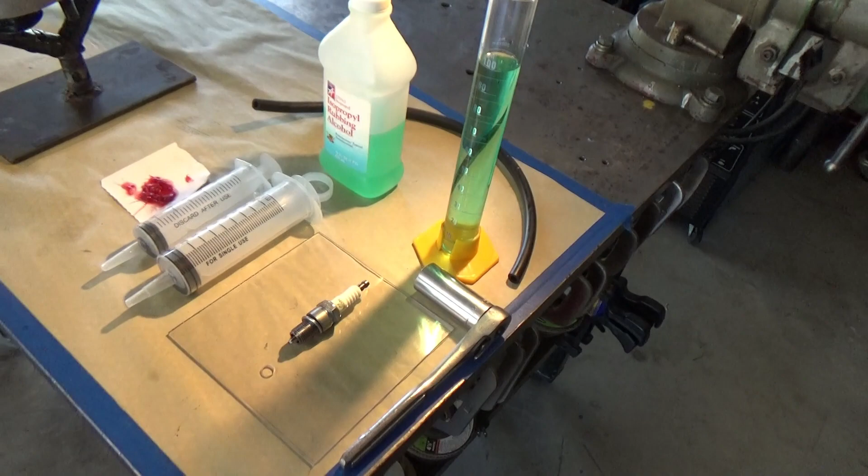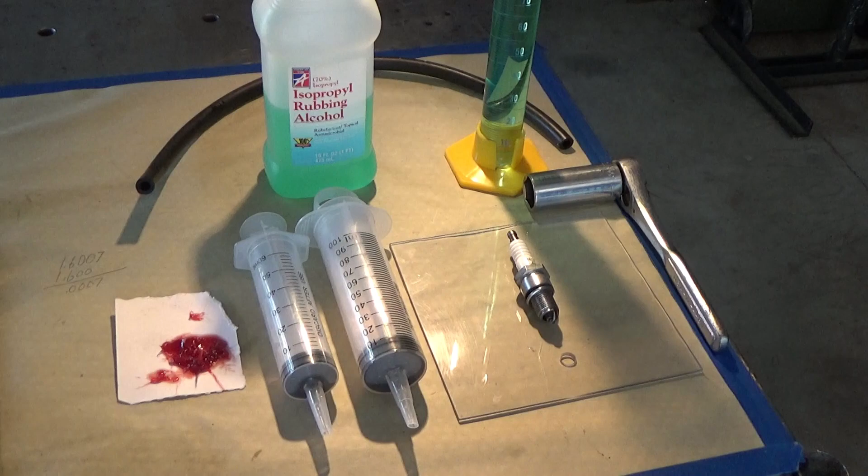On today's video, we're going to be verifying the compression ratio on this Big Block 454 build. Now, here are some of the tools I'm going to be using to get the compression ratio and also to find the cc volume of the chambers there. Now, I went with the syringes just because I thought it might be the cheapest way to go about doing it. You can buy those on Amazon or eBay.

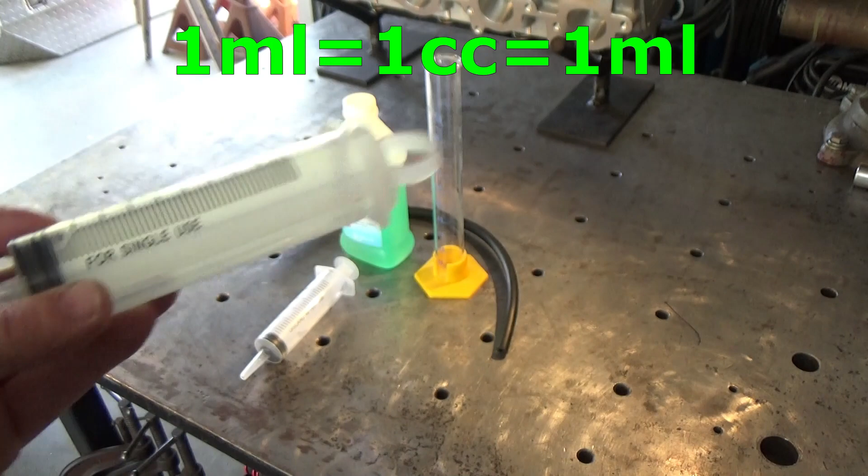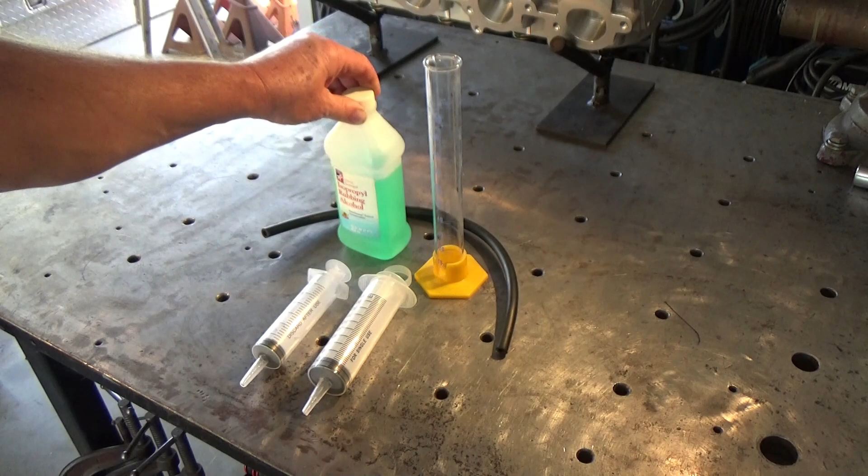Also, they have milliliter graduates, but milliliters and cc's are the same thing. And also rubbing alcohol. I like the surface tension of it. And then also a graduated cylinder. And I seem to like the graduated cylinder a little bit better as far as the measuring.

Alright, so the first thing we need to do is seal up the chamber so it doesn't leak. Now, some people will open the valves up and put a little bit of grease around the valve to be a seal there, but these heads here seem to seal up really good, so there's no leakage there.

So I'm just going to be sealing up the chamber on the outside with a piece of plexiglass. Now, the plexiglass, I just ran down to Home Depot and they sell little pieces there, and I drilled a hole in it, and then the grease seals it to the cylinder head. So we're going to use the syringes first.

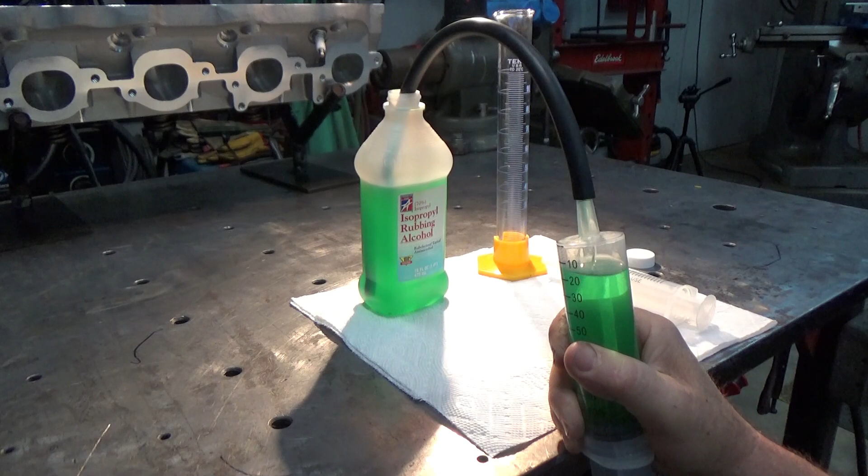I found the easiest way to fill that up was just to put a piece of hose on there, and I could draw some out, and then where I had the air bubbles and the air trapped in the top, I could push it all the way back out and then draw back down to the 100 milliliter mark.

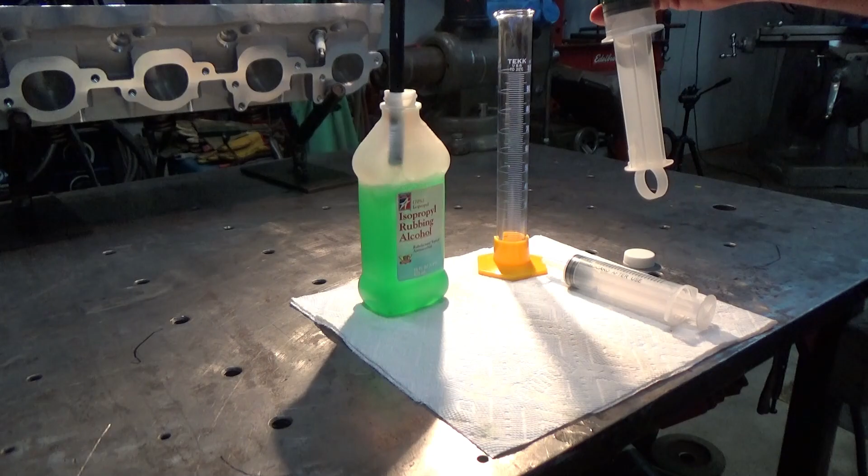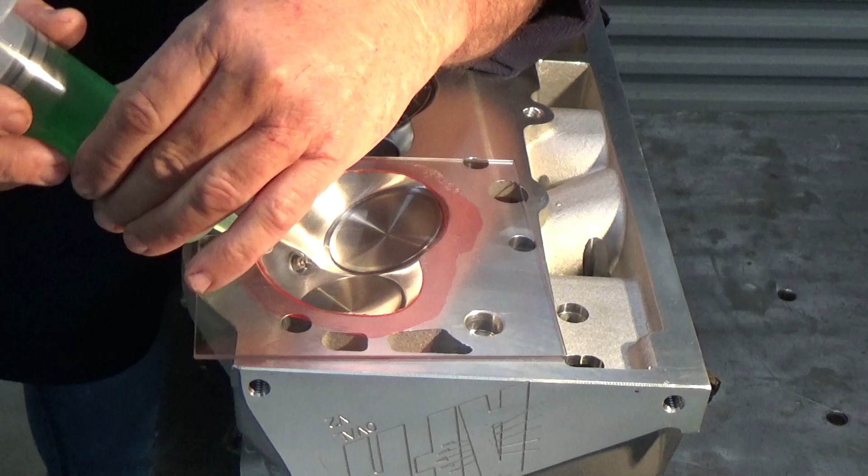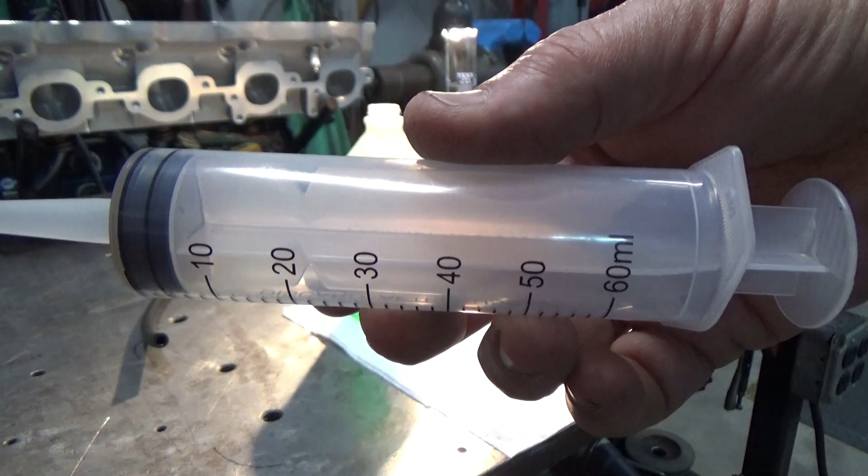Now, since the chambers are advertised at 112 cc's, I knew it would take the whole 100 milliliter syringe, so I just push it straight in there. Now, the second syringe I bought is 60 milliliter, and I thought the graduations might be a little bit more accurate, which is why I bought that, but I ended up not really liking the 60 milliliter one, so I filled it up the same way.

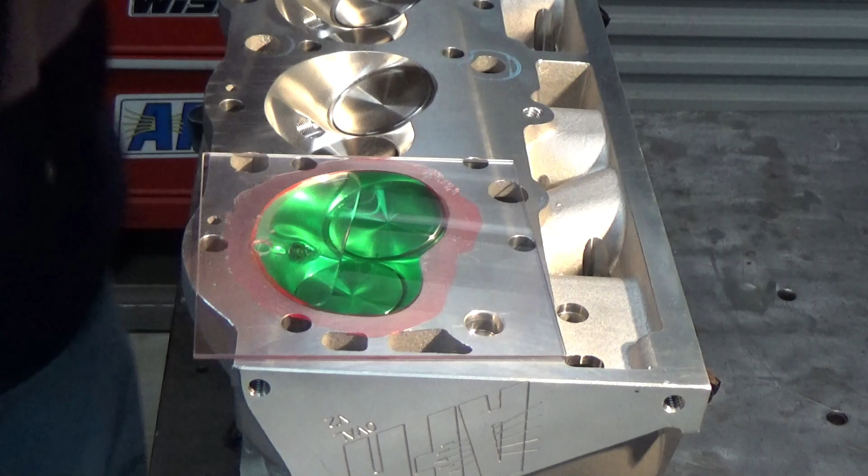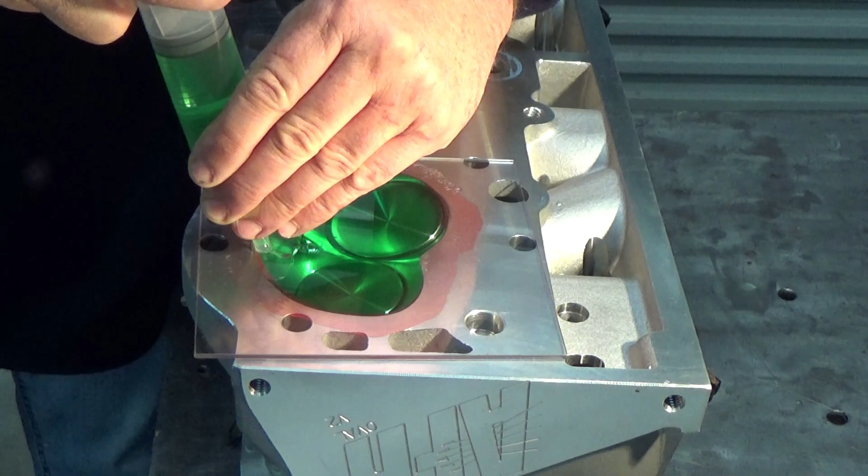Now, one thing I didn't like about the syringes is at the nose, at a tilt, sometimes some of the alcohol would leak out. And also, for whatever reason, when I was pushing on the 60 milliliter syringe, it wasn't smooth, so I didn't have the control that I hoped I would have. But it just could have been, maybe it didn't like the alcohol or whatever, I'm not sure.

Alright, sometimes you'll have some air bubbles. You can actually pick the head up and down, move it around, tap on it a little bit, try to get the bubble to come out, and then you can finish filling it up. Alright, so by the syringes, we have 100 milliliters in there, and that one there is looking like a heavy 13, so 113 cc's by the syringes.

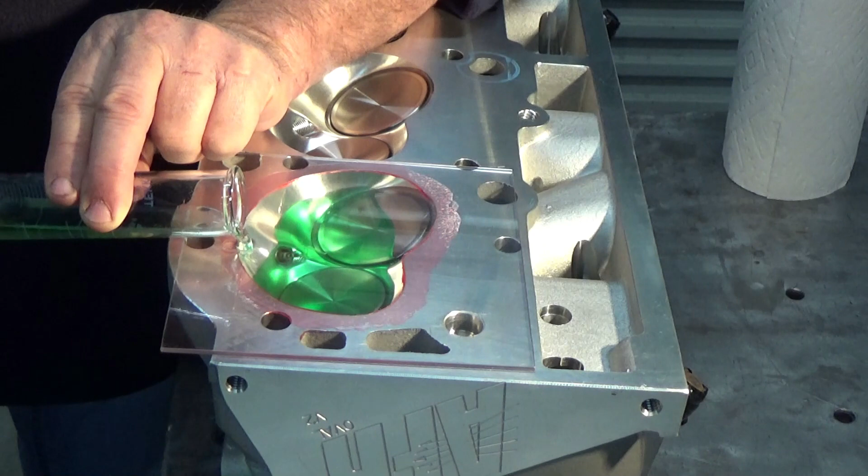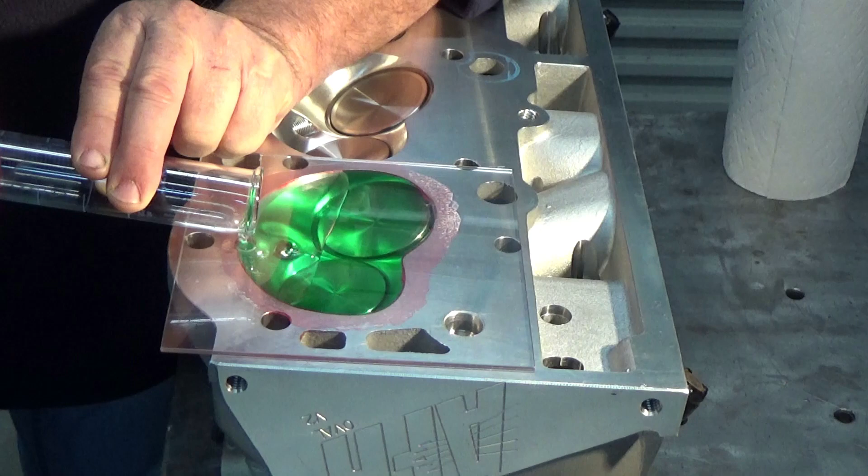Now we're going to use a graduated cylinder, and it's more of a lab type piece of equipment. I feel like it's a little bit more accurate. The hardest part with it is pouring it into the chamber itself, but it actually worked out well. I was able to pour it in there without any trouble at all. Alright, so we got our 100 milliliters in there. Let's fill it back up.

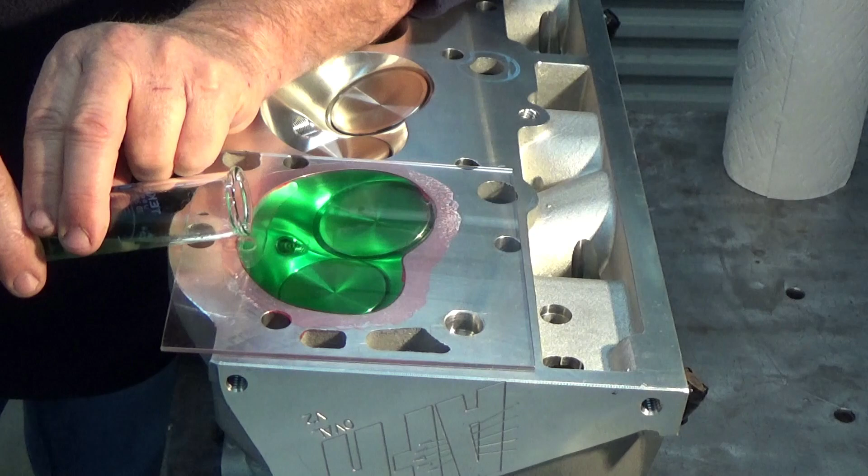Alright, let's see what we got. Now the graduations there are 1 cc, so we have exactly 112 cc's by the measurement of that system. So let's get the other cylinder head on there and verify that it measures at the 112 cc's as well.

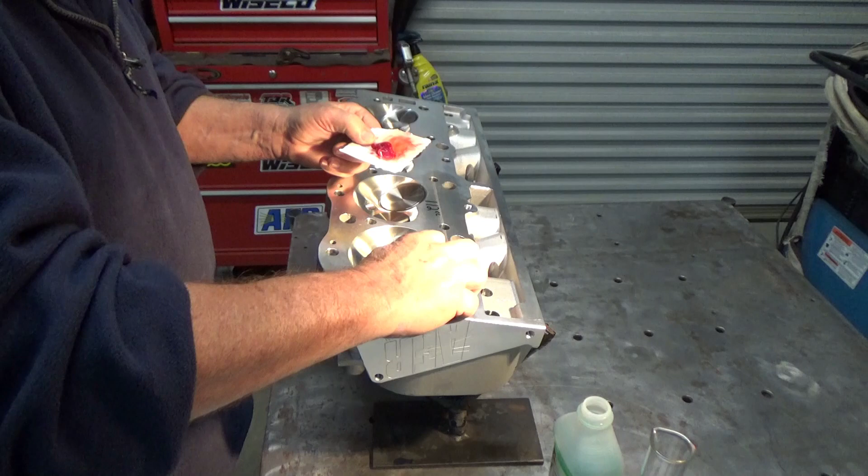Now the reason I'm doing this now is, when I was buying the parts for the engine, I had a target compression of anywhere from 10 to 1 to 10.5 to 1. So all I'm doing now is verifying I'm within reason of those compression ratios I was hoping for. Because at this point here, I could have the head milled.

Say the compression ratio is a little bit low, I could have the head milled. Say the compression ratio is a little bit high, I could have a thicker head gasket. So I still have a few options to get in that target area that I was shooting for on this engine.

And I think we're going to find out that these, you know, I bought these AFR heads and they had CNC chambers and everything. And I think we're going to find out that the accuracy is very good on this stuff. So we'll finish this one up.

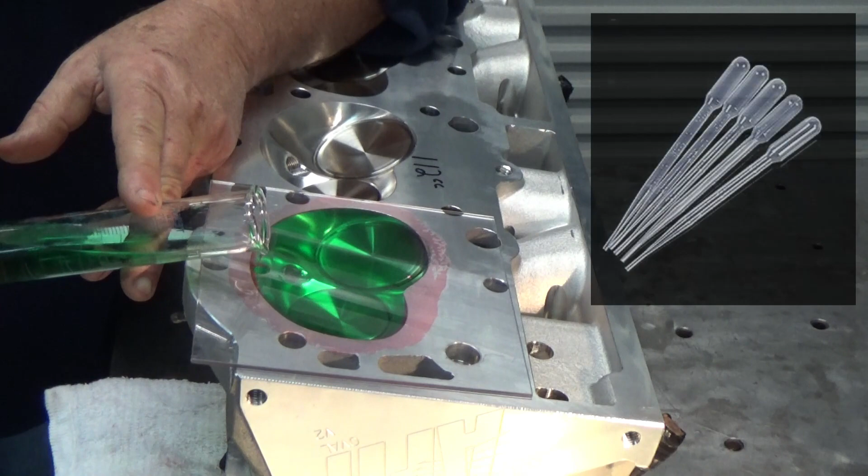And I also thought too, if I had bought some eyedroppers, that might have been even easier on the second part, because whatever's left in the eyedropper I could have dripped back. But there we have exactly 112 cc's again. So both heads measured to be the same.

Now the part I did like about the syringes was getting that alcohol back out of there. Years ago I used to just open the valve up and let it drain out the port, or use a rag to sop it up. But with these syringes I could suck a lot of that alcohol out and save it.

And even green alcohol, at least where I live, was kind of hard to find. So I actually had to make it with some green food coloring I had. And with the leftover alcohol, you can actually use that to help clean up the grease. Alright, so we CC'd those. They're advertised at 112. We found them to be 112.

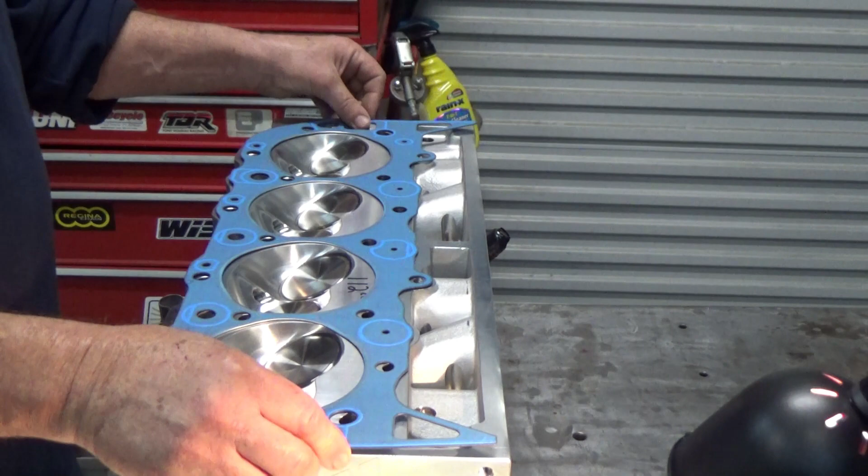So the next thing is the cylinder head gasket and how thick it is and the area it has. So when you look at that, you can see the thickness of the head gasket; we need to figure out how many cc's would fill that area. And luckily, Fel-Pro offers that information for us. So those head gaskets there have 9.17 cc volume.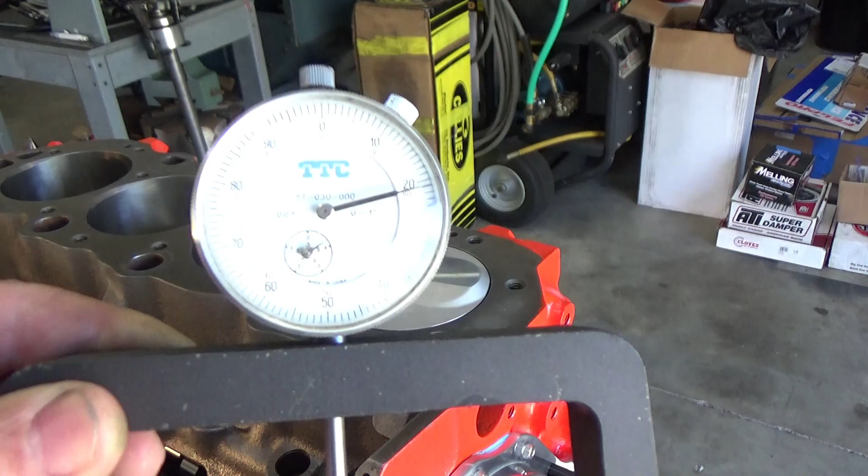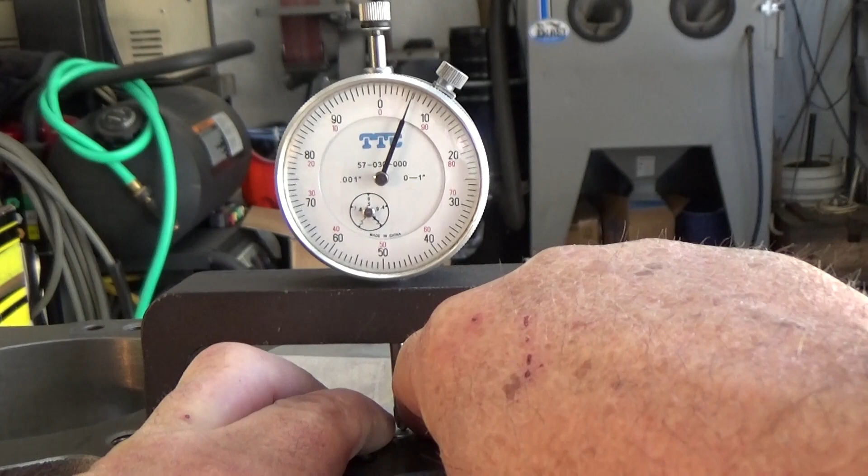So the next thing I want to figure out is the deck height. Now on this engine I went for about a 5 thousandths deck height. That means the deck is 5 thousandths taller than the piston. So with the dial indicator, all I'm doing is getting the piston square in the bore on both sides, and then I'll be able to verify what my deck height is.

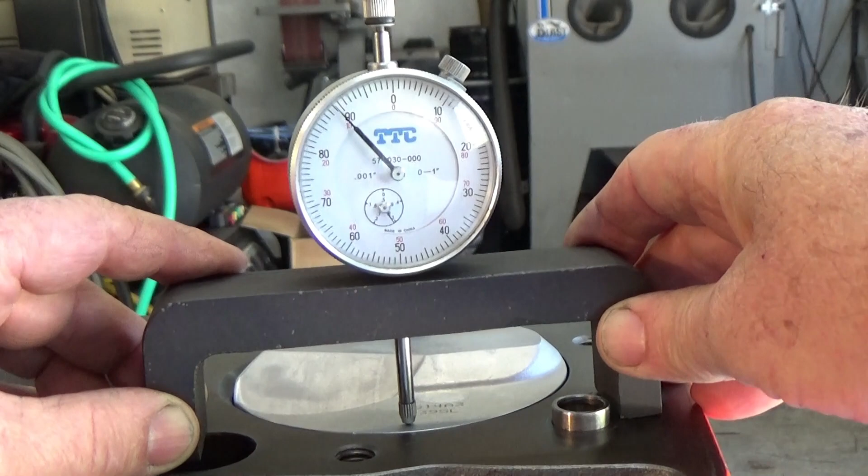Alright, so it looks like I have a 6 thousandths deck height, and so I have to do some math to figure out how many cc's that is.

Alright, also on this engine, I machined valve reliefs on the intake side because of the bore size. I put those valve reliefs in there maybe to help flow a little bit, but also I wonder, well, how many cc's are those? So I'm going to take some clay, an old piston, and see if I can't figure out how many cc's that relief is.

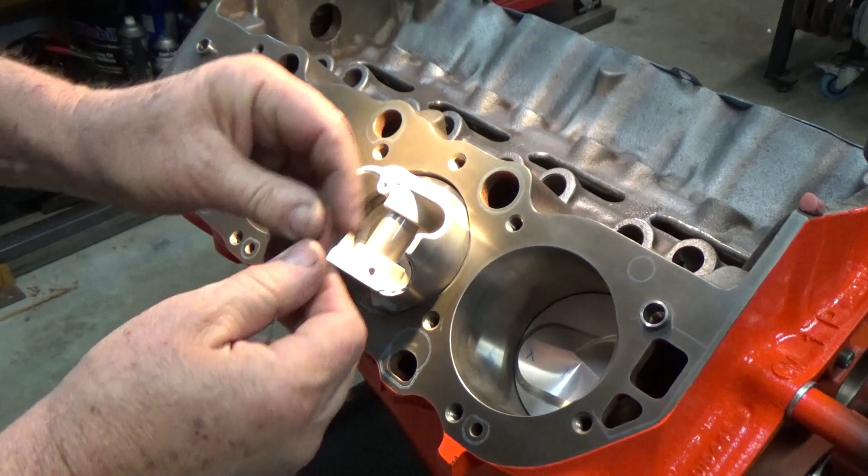So I just stick an old piston in the bore, I take a little bit of clay, and I push it into that relief. Once I have it pushed in there real good, I'll take a razor blade and cut it off at the deck. I pull it out. Alright, so there's a valve relief.

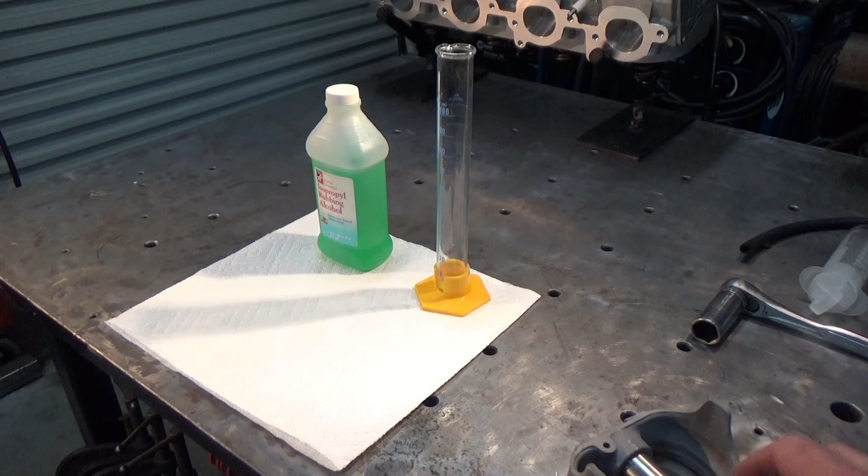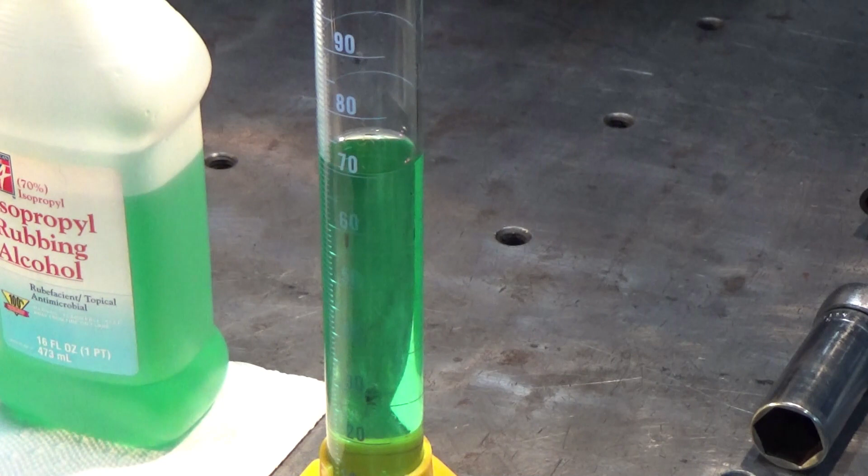And so now I'll take that graduated cylinder and I'm going to fill it with alcohol, say to 70 milliliters exactly. And then I'll peel off that little piece of clay and I'll drop it in there, and however much higher the alcohol rises will be how many cc's that relief is. Alright, let's drop it in there and see what we get. Alright, so it looks like about 1 cc.

Alright, so we got that too. Now the piston pop top, how many cc's that is, and Wiseco offers that information. They're saying it's a plus 21 cc pop top piston. So I can take all that information, I can do some calculations with it, and by the calculations I came up with, I have a 10.146 to 1 compression.

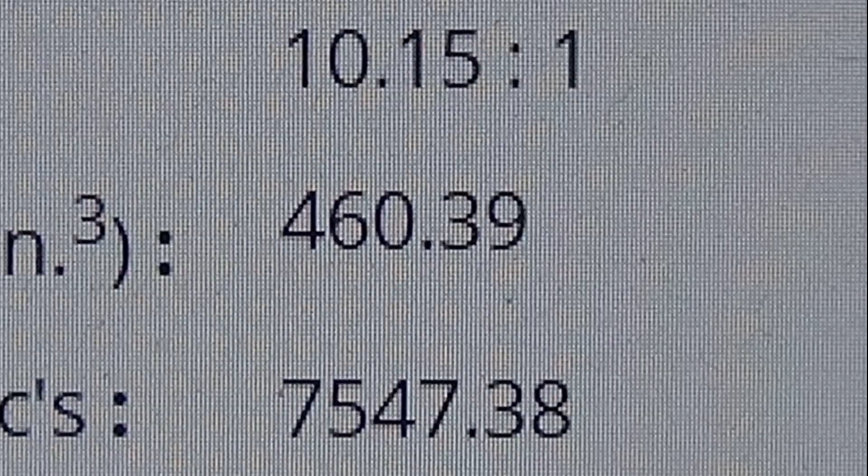You can round that up to 10.15 to 1 compression. But to check myself, I went to Summit Racing. They have a compression calculator. I put all that information in there, and it came up with 10.15 to 1 compression ratio. I also went to Butler Performance Compression Ratio Calculator, put the information in there, and also got the 10.15 to 1 compression ratio. So that verifies it for me. I'm in the tolerances I was hoping to hit with the compression ratio.

At the end of the video, I have how I went through the calculation for any of those who are interested in maybe learning that stuff.

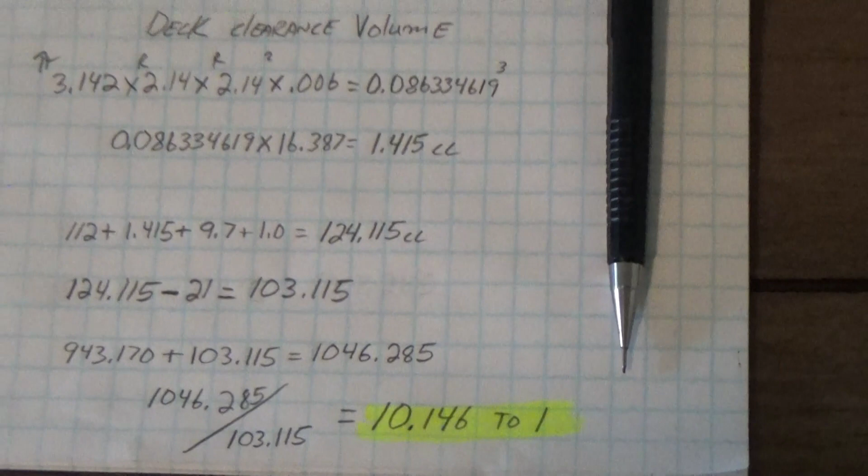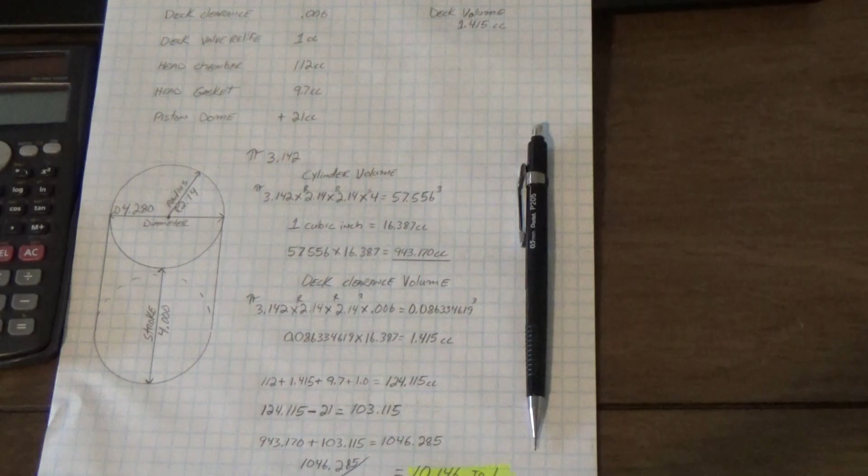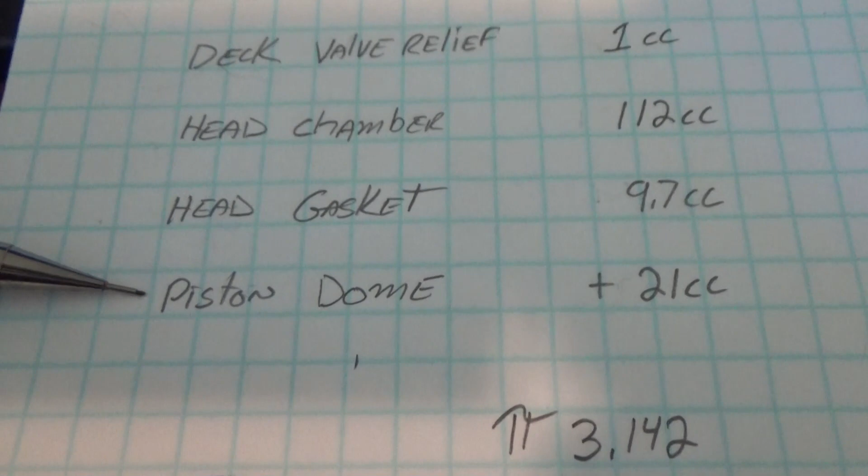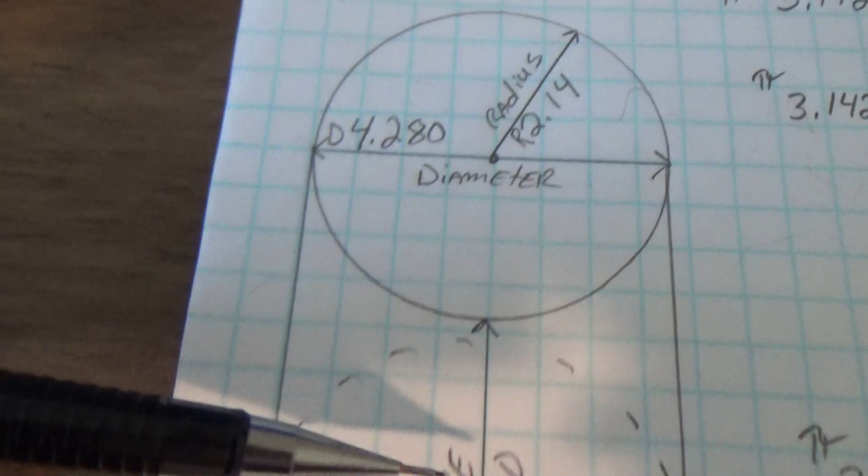Alright, so calculating the compression ratio for this engine, here's the steps I went through to find it. So we've already figured out our deck clearance, our valve reliefs, our chamber volume, our head gasket volume, our piston volume. But I also need to know the bore of the engine. So this 454 here is a 30 over, so the bore diameter is 4.280 now. And to get the cubic inches, we need to know the stroke. So it has a 4-inch stroke.

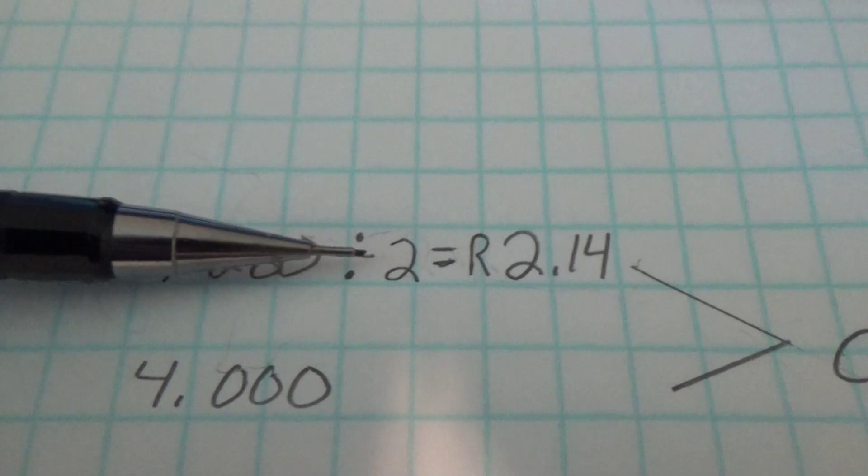Alright, to figure this out, I need the radius of the diameter. So all I do is divide the diameter by 2 to get the radius of 2.14. Diameter is 4.280 divided by 2 gives us a radius of 2.14 with our 4-inch stroke. And so I came up with a cylinder volume of 943.170 cc's, and this is the calculation I did to get those numbers.

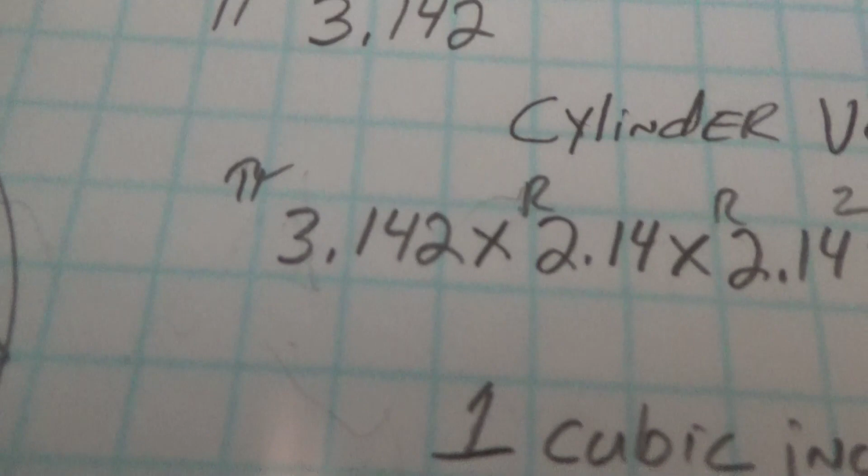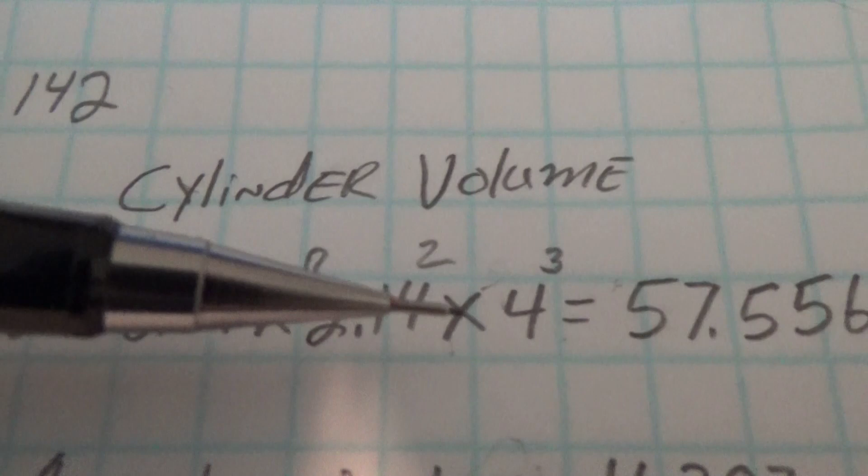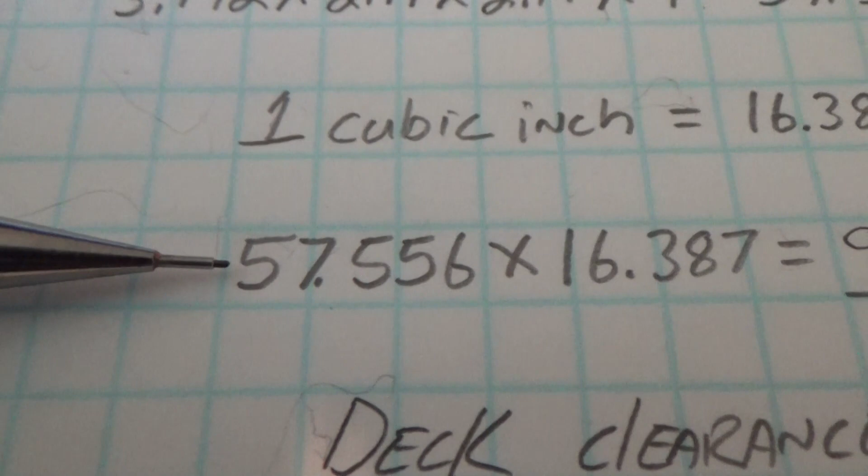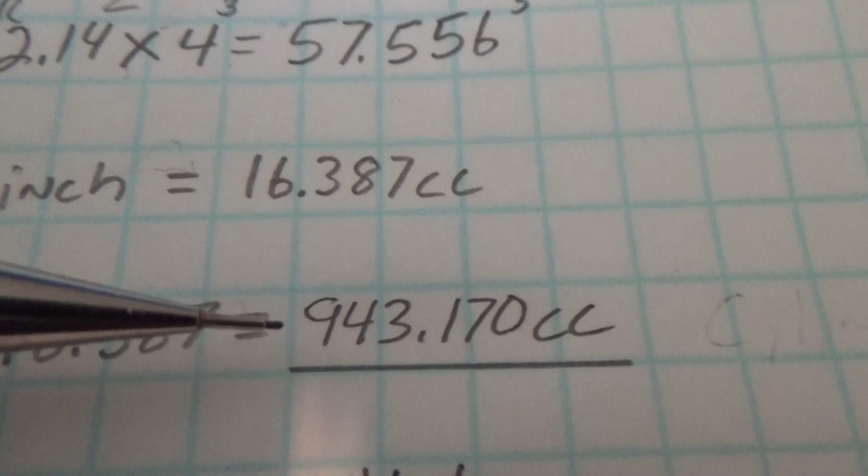So I took pi 3.142 times radius 2.14, then to square it I times radius again 2.14, then to cube it I did times 4, the stroke of the engine, and that gave me 57.556 cubic inches. To convert it to cc's, 1 cubic inch equals 16.387 cc's. So I take the 57.556 times 16.387. That gave me a total of 943.170 cc's. So there's our cylinder volume.

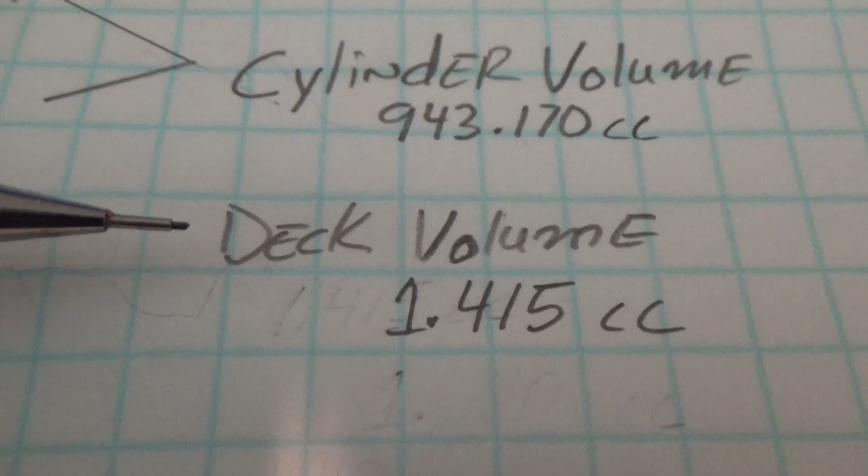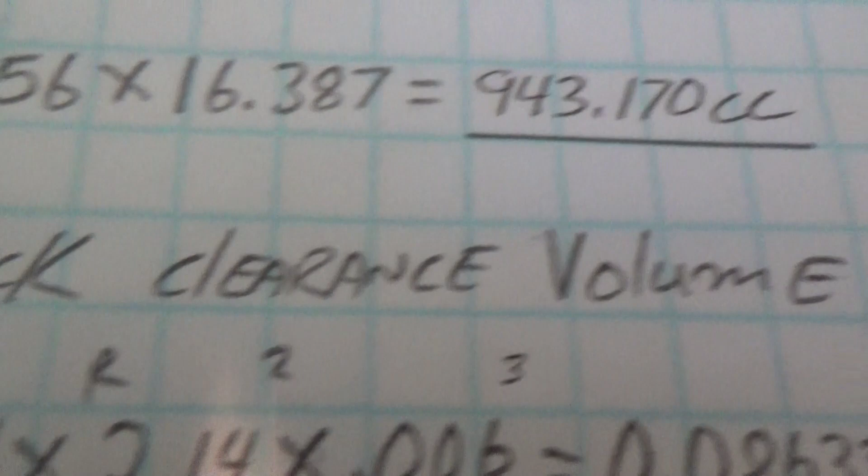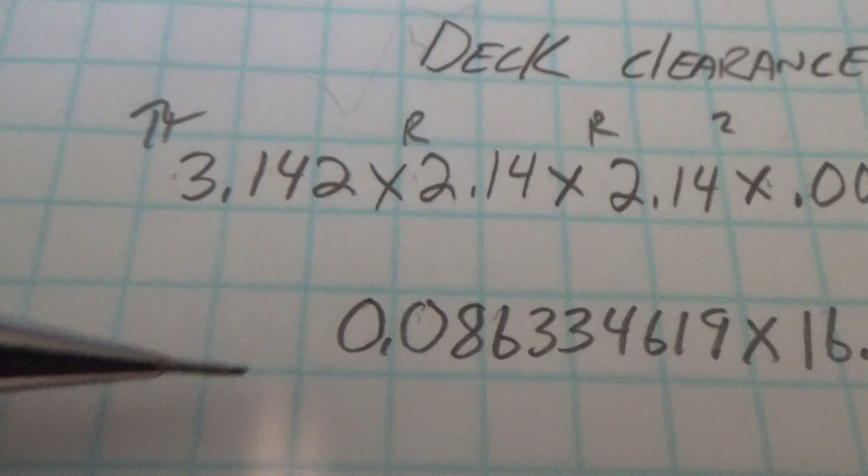Now our deck volume, that's where the deck was 6 thousandths taller than the piston. To come up with this number, I basically did the same thing. Deck clearance volume: pi 3.142 times the radius 2.14 times the radius 2.14 to square it, and this time instead of 4 inches we only have 6 thousandths. So that's the cubic inches. I take that number times the 16.387 to come up with 1.415 cc's. So that's how I came up with the deck volume.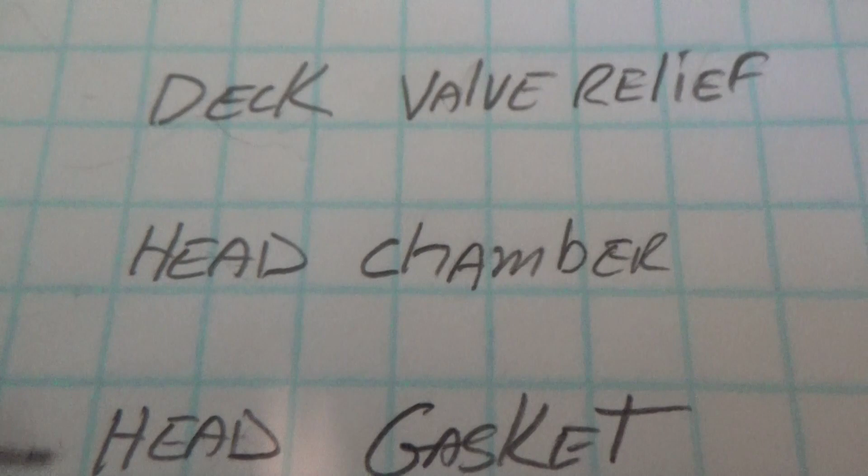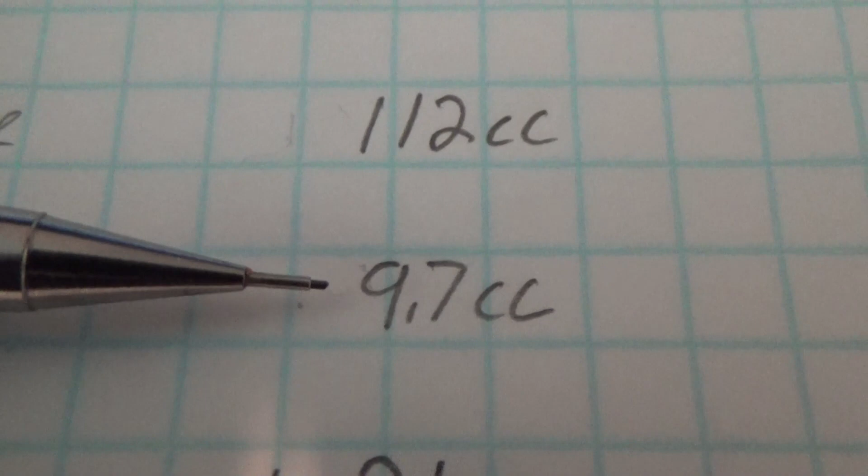So the next thing was the valve relief in the deck, and we took clay and found that to be about 1 cc. The head chamber is advertised at 112, and we found it to be 112. The head gasket, they offered that information of 9.7 cc's. And then the piston dome is advertised at plus 21 cc's. So now we have all the information to plug in and find out what our compression is.

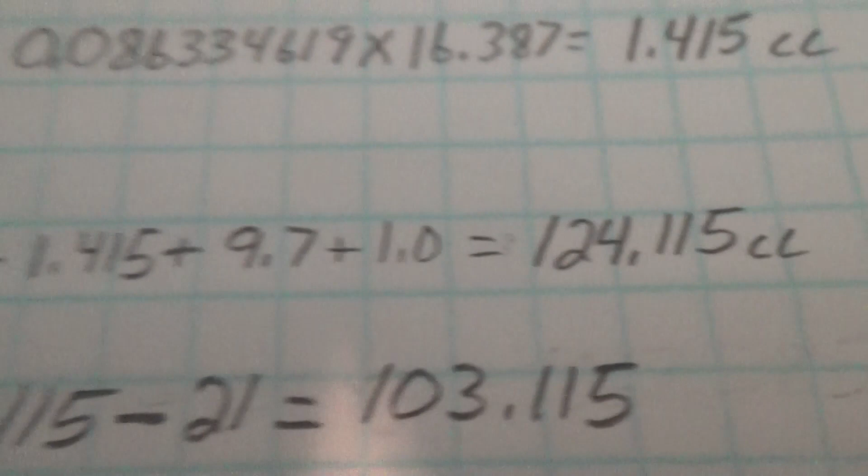So I added the chamber of 112 plus the deck volume plus the head gasket volume plus the relief I had ground in the deck to come up with a total of 124.115 cc's. Then I subtracted 21 cc's for the pop top piston. That gave me a total volume of 103.115. Now I take that number and add it to the total cc's of the cylinder.

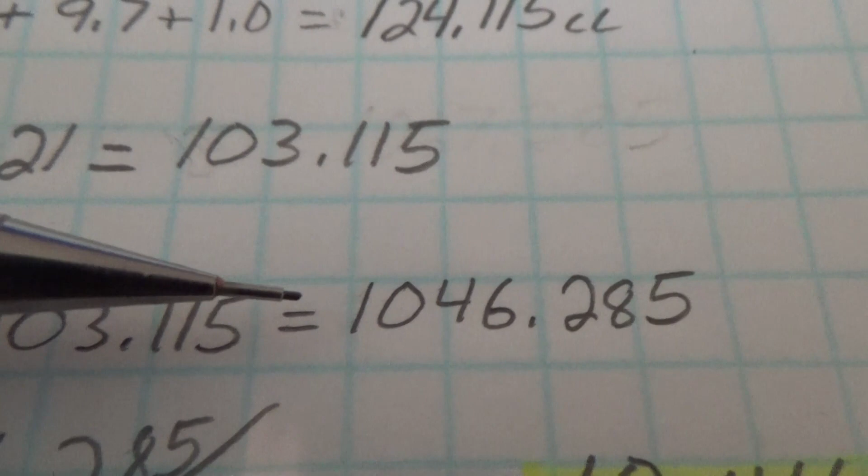So I add those two together and it gives me a total volume of 1046.285 cc's. Now I take that number, divide it by the chamber number, and it gives me a compression ratio of 10.146 to 1. And you could round that up to be 10.15 to 1 compression.